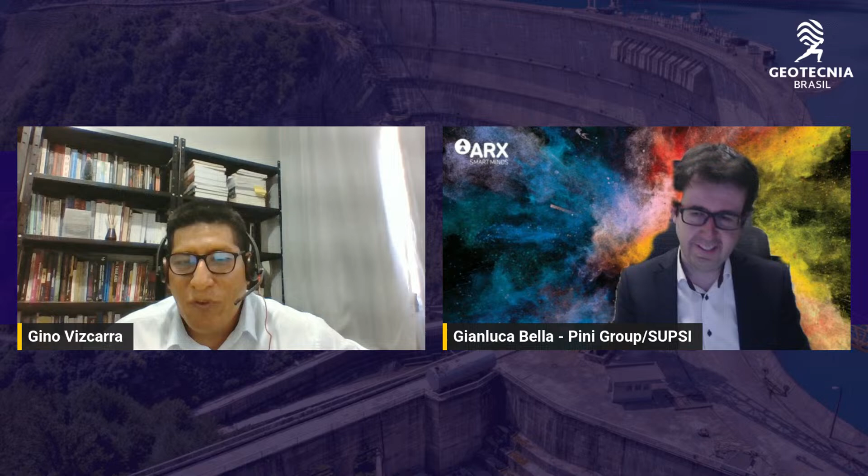Good afternoon, ladies and gentlemen. It's a pleasure for me to be here to hold this lecture titled An Insight into the Water Retention Capability of Unsaturated Fluorite Mining Tailings.

This lecture aims to provide an insight into the water retention capability of the Stava tailings collected from the Prestavel Fluorite mine that failed in 1985 in Italy. The focus, the objective of this presentation, will be the evaluation of the water retention curve as a key tool for tailings characterization and for interpreting some peculiarity of the unsaturated soil response.

Let's have a look at the index. First of all, an introduction. Then I will provide you with some basic concepts about unsaturated soil mechanics. The third chapter is devoted to describing the case of Stava tailings - the event, the geomechanical characterization of the tailings, the experimental apparatus I used and the testing techniques - and I will describe the experimental results with some comments. Then I would like to present some additional applications, in particular how the water retention curve has been used by me and my colleagues to interpret the volumetric soil response of tailings and the deformability behavior of the soil. Then some conclusions will follow.

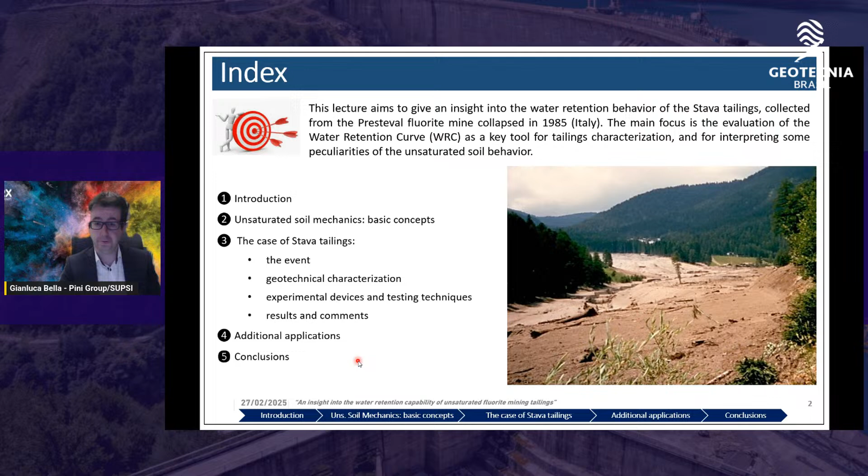So we can start with the introduction. What are tailings? Of course, tailings are the waste materials of a mining operation. They mainly consist of a mixture of silt, clay, sand, with usually a high content of metals, processed water coming from the mining operation, and chemical reagents. Depending on the solid-liquid ratio, they can show the consistency of a slurry, cake, or a paste. Tailing dams are complex geotechnical systems that contain the waste products of mining operations. They mainly consist of a decant pond, which we can see in the picture below, a raised embankment - the dam that we can see here - and a transitional intermediate zone, the so-called beach. There are many different rising techniques for tailing dams, such as upstream, downstream, centerline, and so on. This topic is quite large, and I will just show you in the introduction with some recall.

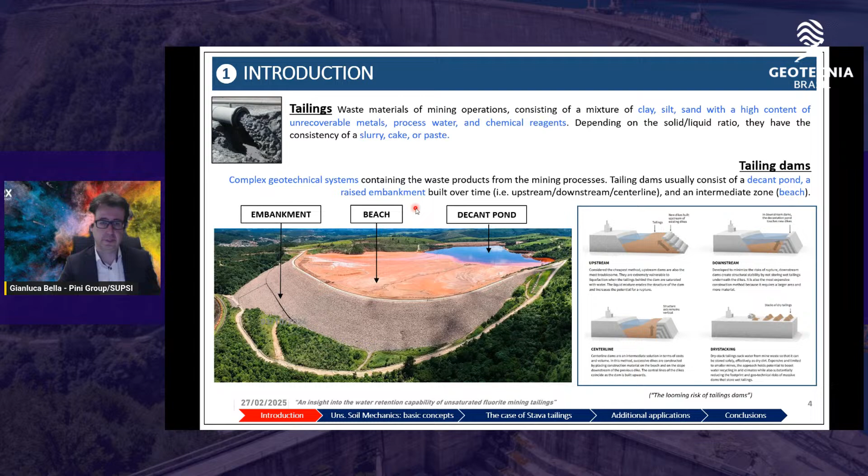Why is the stability of tailing dams relevant, especially nowadays? Well, it is relevant because tailing dams are complex structures that are particularly prone to failure for many reasons. For instance, they are made of heterogeneous filled material, they are raised over a large period of time, sometimes there is poor regulation governing the design criteria, and their large surface makes punctual criticality identification quite difficult. So they require extensive and continuous monitoring.

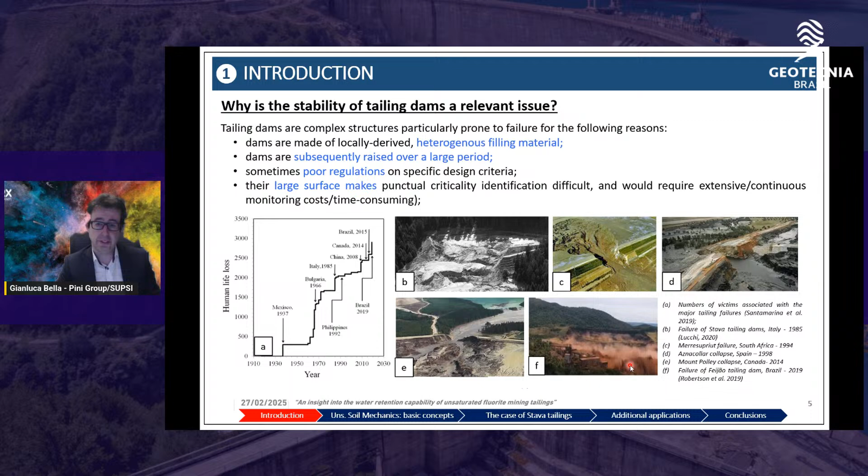Here we have an example on the right of some famous collapses. Here you can see the Stava collapse in 1985, the Merriespruit in South Africa in 1994, the Aznalcollar in Spain in 1998, and the more recent collapses, Mount Polley and the Feijão Dam some years ago.

The analysis carried out in the literature highlights that the historical trend regarding the number of failures is quite high. We can see from this graph that there is an average of 2.5 failures or collapses per year, which is quite a high number.

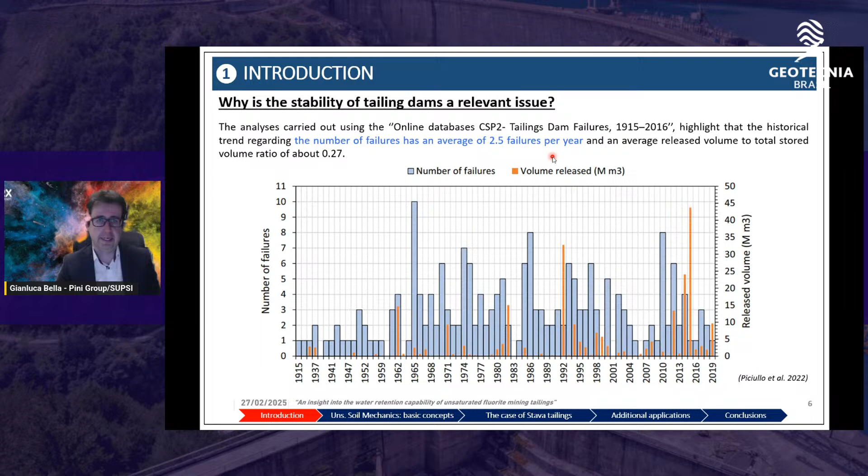The collapse of the structures results in casualties, environmental costs, and so on. As we can see in the picture below, the tailings growth is estimated at about 12 kilometer cube, so it is a very high quantity.

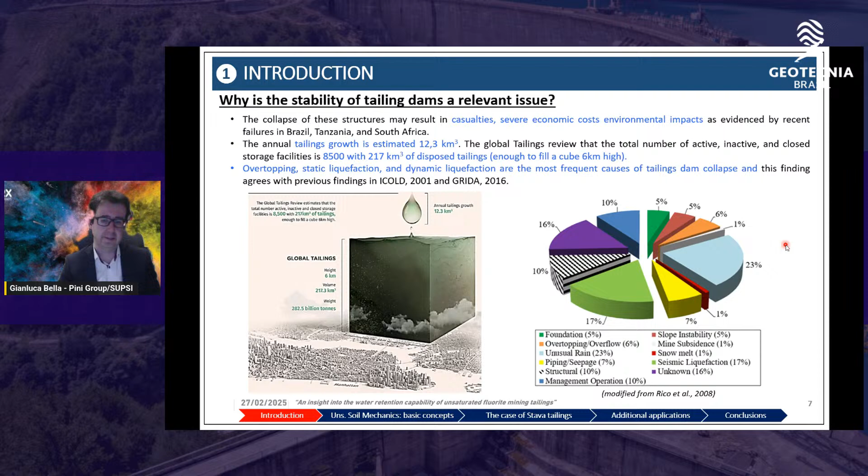As we can see in the picture on the right, the main causes of failure are overtopping, static liquefaction, cyclic or dynamic liquefaction, and so on. So these structures are quite problematic and need deep investigation.

Here I resume the main causes of tailing dams collapse. The collapse of tailing dams could be due to one or a combination of many factors. I listed the main ones: poor drainage, poor design, poor maintenance, seismic activity leading to dynamic liquefaction of the soil, foundation instability, erosion, slope instability, piping and seepage, structural failures, human error,

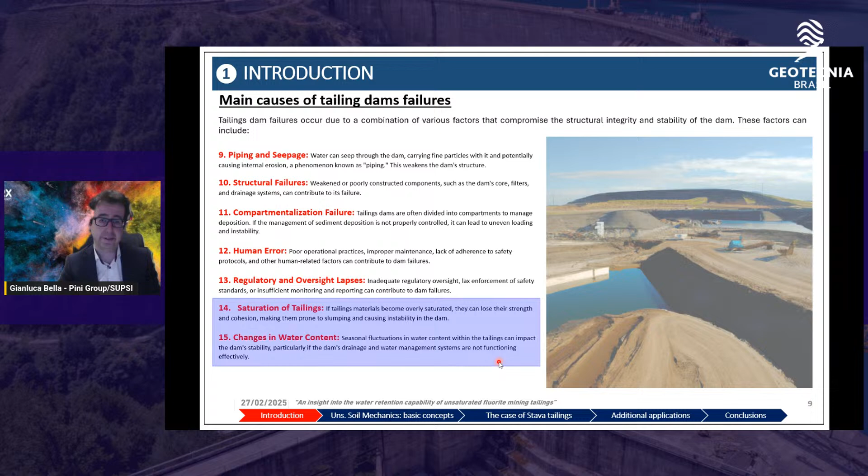or one of the most critical causes, the saturation of tailings and the change in water content. These causes are strictly related to the topic of this presentation.

As we can see in these pictures, a wide surface area of tailings is exposed to the atmosphere, which governs the position of the water table within the basin, as you can see here, leading to variation in the extension of the unsaturated zone above the

phreatic surface. So the unsaturated condition mainly involves a large portion of tailings, and this is why we are dealing with tailings in unsaturated condition in this lecture. In particular, the unsaturated condition involves a shallow layer, because they are involved in the water exchange with the atmosphere, for example infiltration, runoff, evaporation, and so on.

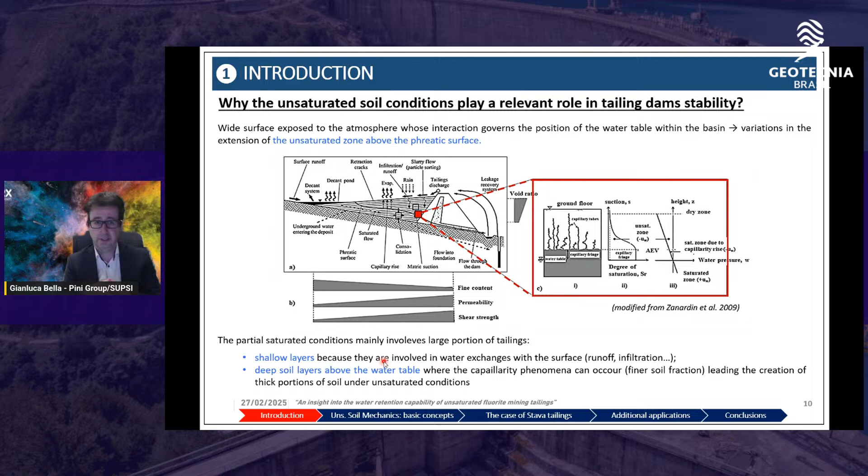But partial saturated condition also involves deep soil layers above the water table, where the capillarity phenomena that we will see in the next picture can occur.

In fact, as we have a small variation in degree of saturation, we have a big variation in the B Skempton parameter, and a big decrease in excess pore pressure. So this influences in a great manner the static liquefaction susceptibility.

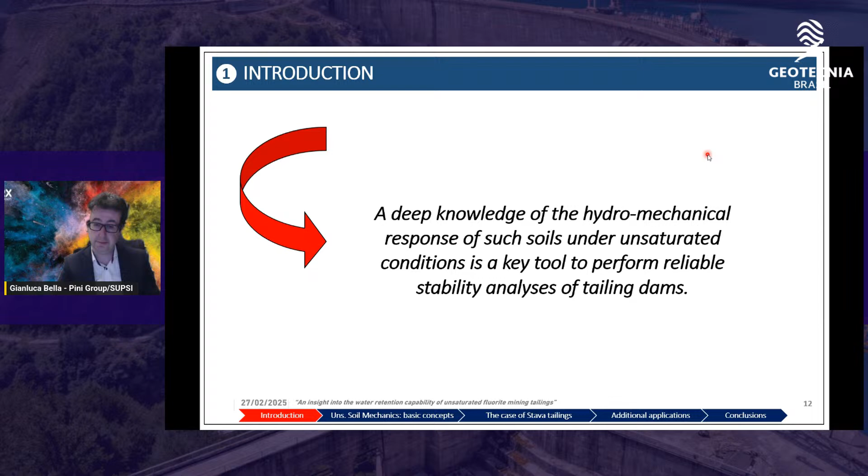Okay, now we can proceed with some basic concepts, with some recall about unsaturated soil mechanics, before showing my experimental investigation.

Below the water table, we are under saturated condition, so the pore pressure is positive and the degree of saturation is 100%.

Above the water table, what do we have? We have, first of all, a zone where we still have full saturation of the soil. This is the capillarity saturation zone.

And then after a certain height, we have a partially saturated zone. In the unsaturated zone, the degree of saturation ranges between 0 and unity. The pore pressure is negative and the suction is positive.

We can say it's worth noting that the capillarity height is related to the diameter of the tube: smaller the diameter, the radius of the tubes, higher will be the capillarity height, and after that it also depends on the material, for example.

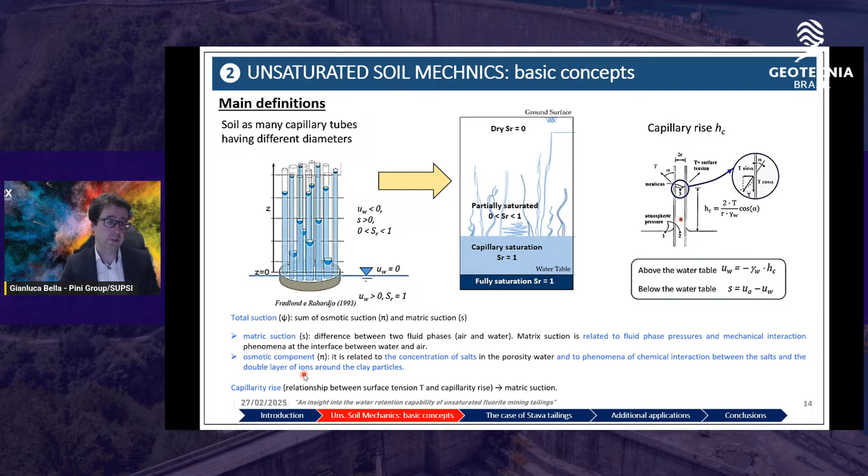The capillarity is governed by suction. The suction is the total suction, and can be divided as the sum of osmotic and matrix suction. The matrix suction is mainly related to the fluid phase pressure and the mechanical interaction phenomena at the interface between water and air, while the osmotic component is mainly linked to the concentration of salts and to phenomena of chemical interaction between the salts and the double layers of ions around the clay particles.

In unsaturated soil mechanics, we have three phases: the soil phase, and the void filled partially with water and partially with air. In unsaturated condition, the water in the contact zone between the grains gives menisci in a manner similar to what occurs in a capillary tube, producing a state of compression, the force P, between the grains. This is a great effect in unsaturated soil mechanics because it implies an increase of the normal stress between particles due to this force, so an increase of shear strength in unsaturated conditions, and a reduction of sliding occurrence.

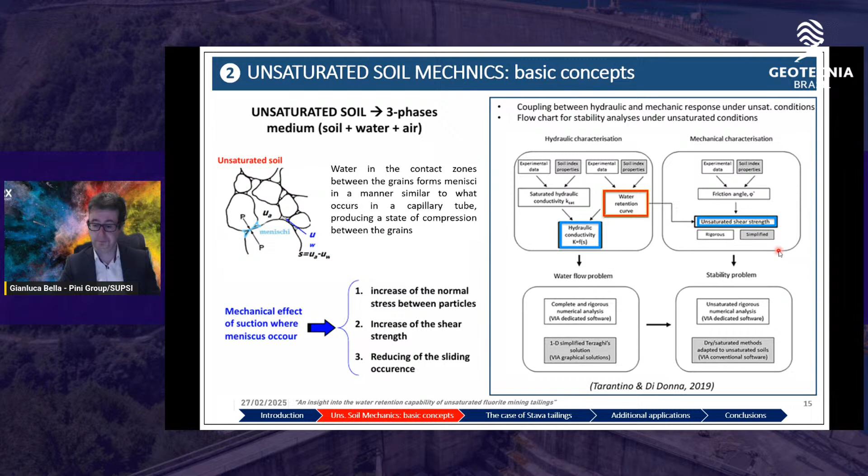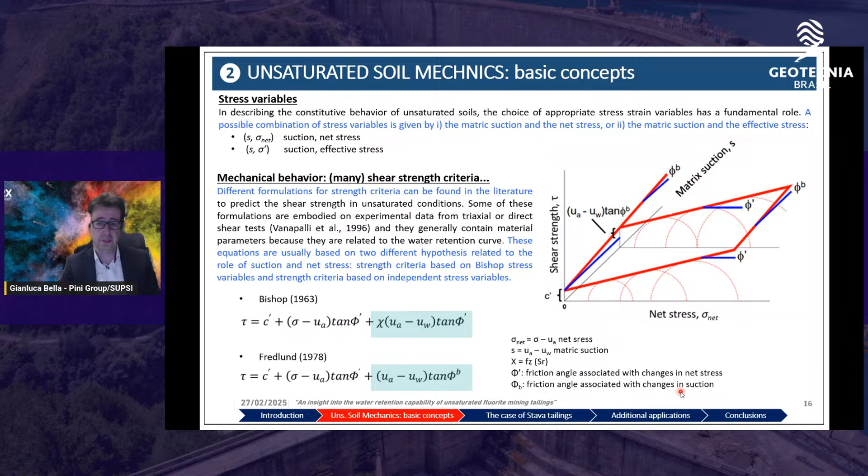Another formulation is the one proposed by Fredlund in 1978, which requires more parameters because, for instance, it depends on the friction angle associated with the change in suction.

So what is the water retention curve? That is the topic of this lecture. The water retention curve relates the water content, or the degree of saturation, or the water ratio of a soil with its suction.

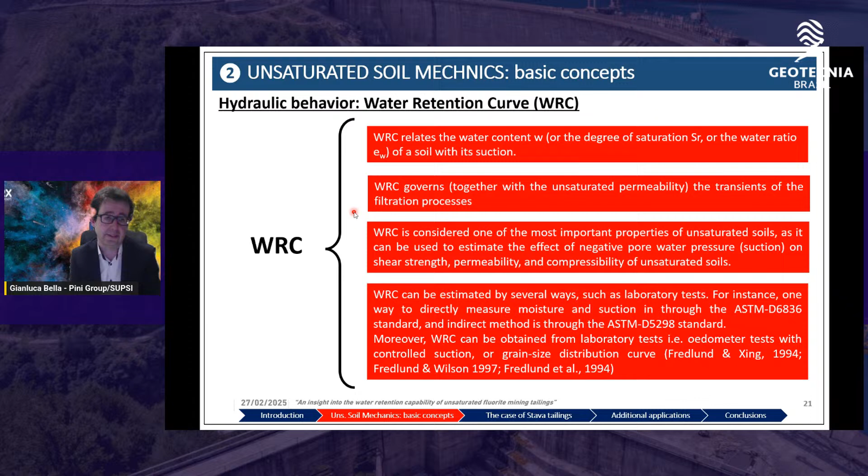So it can be estimated, as is the topic of these lectures, in several ways, such as laboratory tests, and can be obtained, for example, from oedometer tests, from suction-controlled oedometer tests, or from the grain size distribution curve.

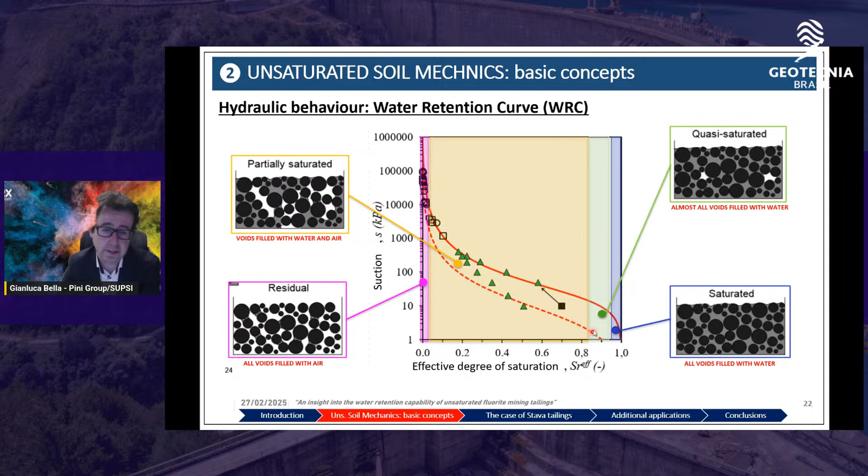This curve is able to describe the drying and wetting process of the soil, so the capability of the soil to retain water. It is strongly connected to capillarity, as I showed before, because above the water table we have a zone where capillary saturation is with a degree of saturation equal to 1, and if we represent this with the water retention curve...

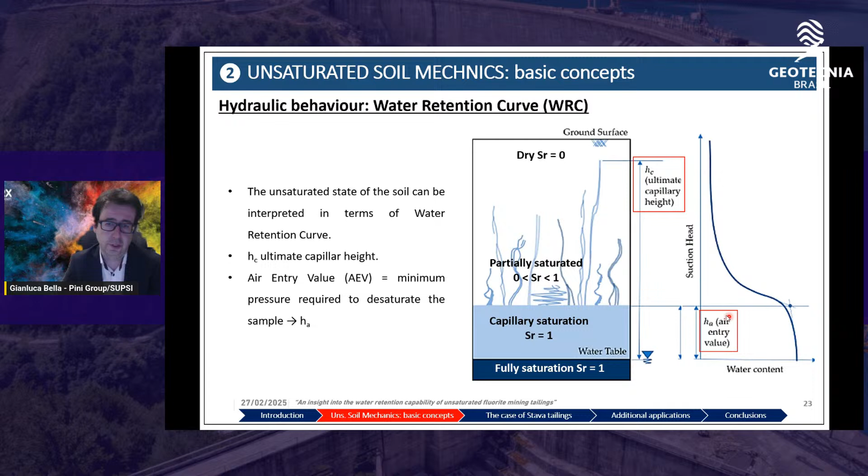This head corresponds to the air entry value of the curve, the point after which the saturation of the soil assumes very fast values less than 1. So we have the air entry value as the minimum required pressure to desaturate a sample.

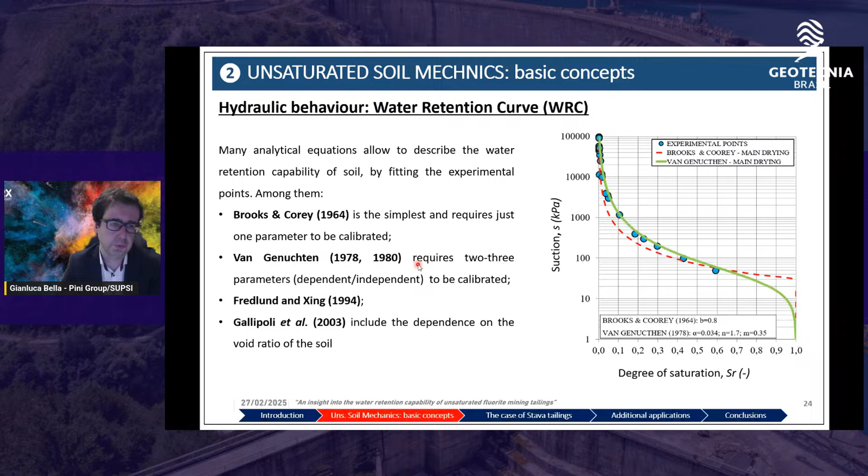There are many formulations to describe the water retention curves: the Brooks and Corey, the famous Van Genuchten model, and the Gallipoli model. So we have experimental points, and we can decide which formulation is the best. Of course, there are a number of parameters to be calibrated, different from one formulation to another.

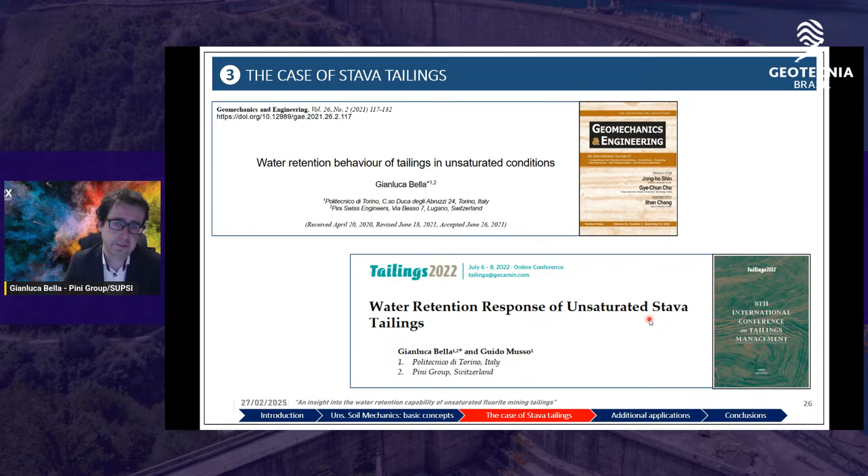After this short recall about unsaturated soil mechanics, we can start describing my research and experimental results. The results and interpretation I will provide are described in detail in some papers I published recently. For instance, this one, 'Water Retention Behavior of Tailings in Unsaturated Condition,' and more recently this other paper where you can find more detail.

The soil, the tailings I investigated, is the silty and sandy fraction of tailings taken from the lower portion of the Stava upper dam, built one above the other on a natural slope near the city of Stava, in Italy. The two tailings dams were gradually raised in an upstream way to store the waste products, the tailings, coming from the separation process of the Prestavel fluorite mine.

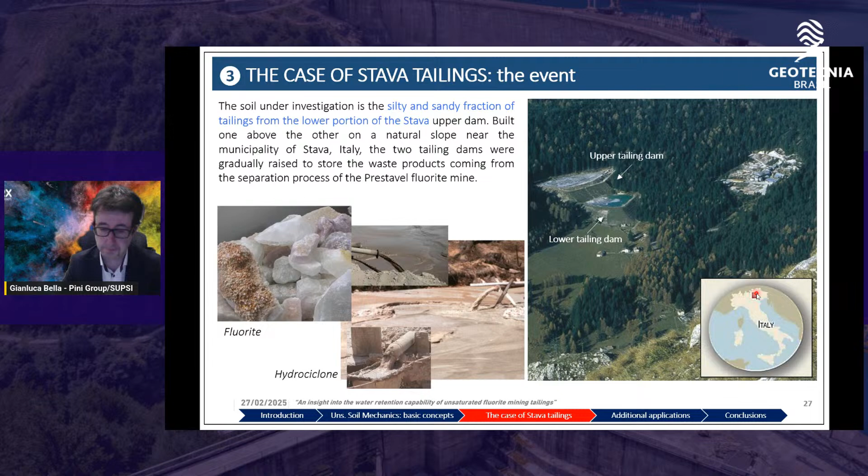What happened? On the 19th of July in 1985, the upper tailings dam collapsed onto the lower dam, which in turn collapsed, triggering the static liquefaction of the stored materials. A very big volume of tailings, a mud flow, spilled out into the Stava valley.

The mud flow traveled, reaching the Stava municipality, located south of the embankment. You can see here the embankment. It destroyed this municipality, continued its path, and reached the city of Tesero.

268 people died. There were a lot of environmental and economical damages. The poor drainage, high phreatic levels, and unconsolidated state of the stored tailings are supposed to be the main factors leading to the static liquefaction of these tailings. The tailings I tested were taken from the upper embankment, here more or less.

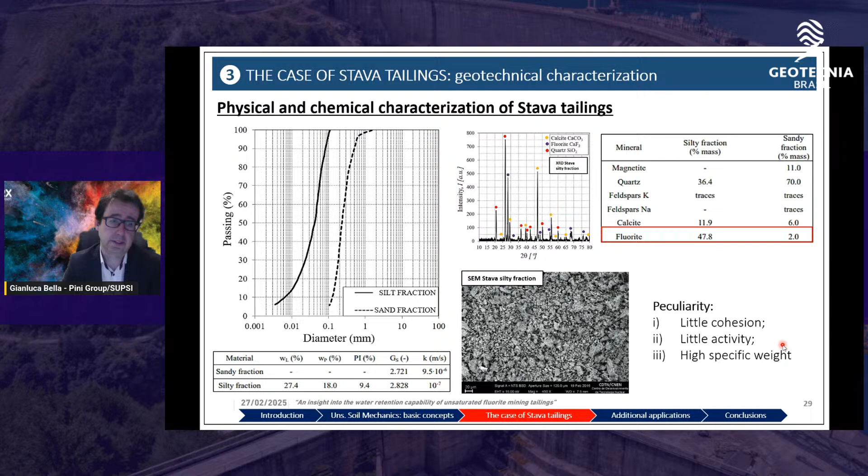Here you can see the plastic Atterberg limits, the hydraulic conductivity, and we performed some electron microscope analysis on these materials, so we saw that the silty fraction was made up mainly of fluorite and quartz. The peculiarity of these tailings is little cohesion, little activity, and high specific weight.

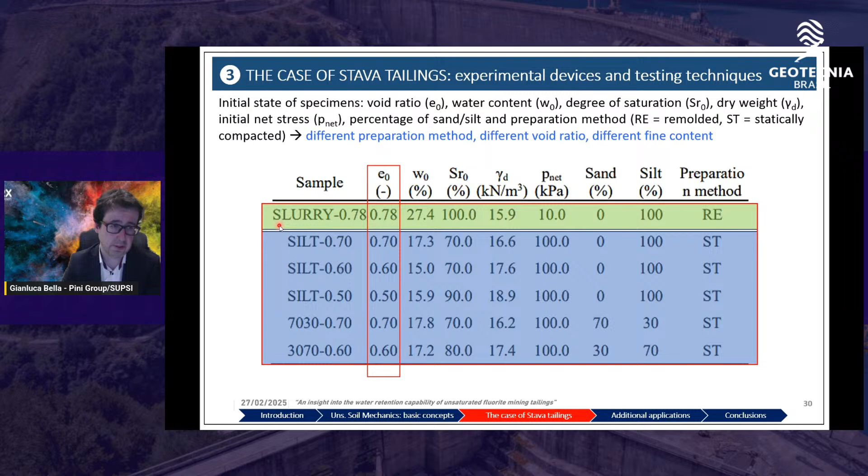Here you can see the slurry, and here the compacted specimen, together with different initial void ratios and different fine contents. This is pure silt, and these are mixtures made of sand and silt.

The water retention behavior was investigated by means of different techniques. First, the suction was imposed and the water content was monitored, using the axis translation technique and the vapor equilibrium technique. Or we adopted other tests where the water content was imposed and the suction was measured, using the dew point method.

This is an example of the water retention curve that we obtained, with the experimental points: the green points from the axis translation technique, the red points from the dew point technique, and the blue points obtained with the vapor equilibrium technique.

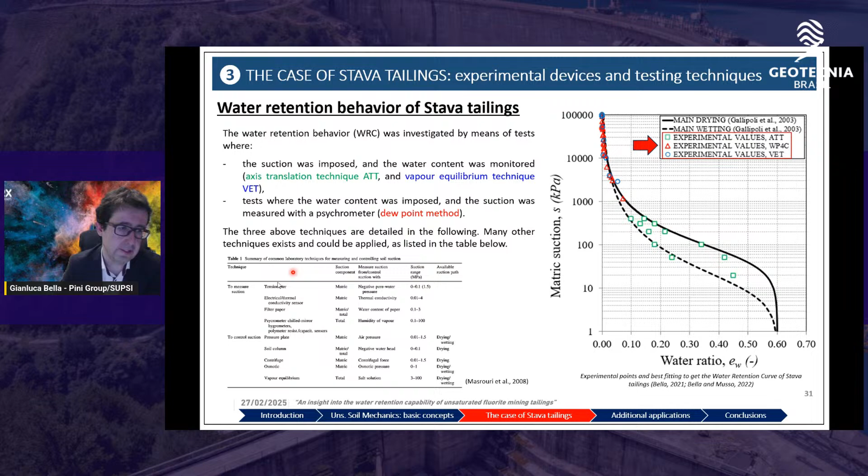It's worth noting that we adopted these three techniques, but in literature there are many other techniques that I listed in this table. The first technique we use is the axis translation technique.

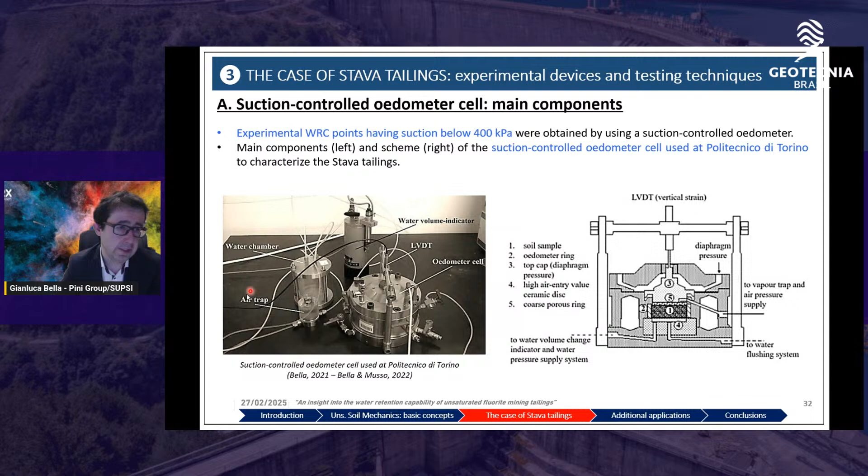As I told before, we adopted a suction-controlled oedometer cell, so the experimental points having a suction below 400 kPa were obtained with these suction-controlled oedometers. This is a picture of the oedometer I adopted at Politecnico di Torino to characterize the Stava tailings, and here we can see the main components: the cell, the LVDT apparatus, the water volume indicator, a water chamber, and the air trap. On the right, we can see a scheme of such apparatus. What is the working principle?

Different air pressure and water pressures are imposed to control the matric suction, that is the difference between air pressure and water pressure. Then exchange of water inside and outside of the sample is measured, providing the degree of saturation of the sample. This procedure is repeated by imposing different suction values, increasing or decreasing the suction, so imposing drying and wetting paths to obtain many experimental points to fit the water retention curve.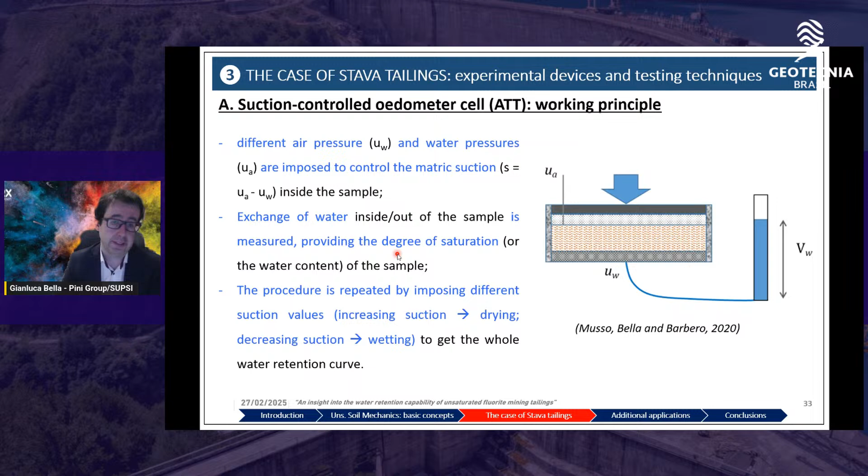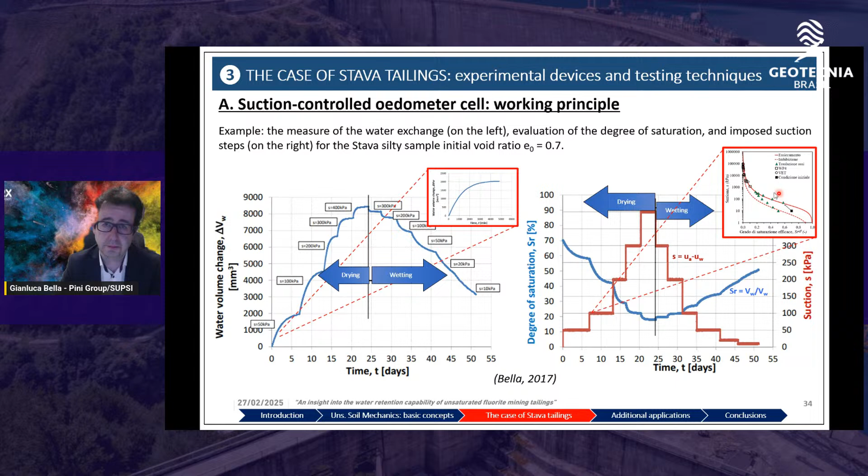The second technique we used for obtaining the water retention curve was the vapor equilibrium technique. The experimental points with suction up to 70 MPa were obtained with this technique.

The vapor equilibrium technique is a method allowing control of the relative humidity to impose a certain total suction. The total suction was imposed by creating a controlled humidity condition in a closed box using a chemical solution. This condition is obtained in a sealed glass container with a support in order to hold the sample. Inside the box, we have a chemical solution.

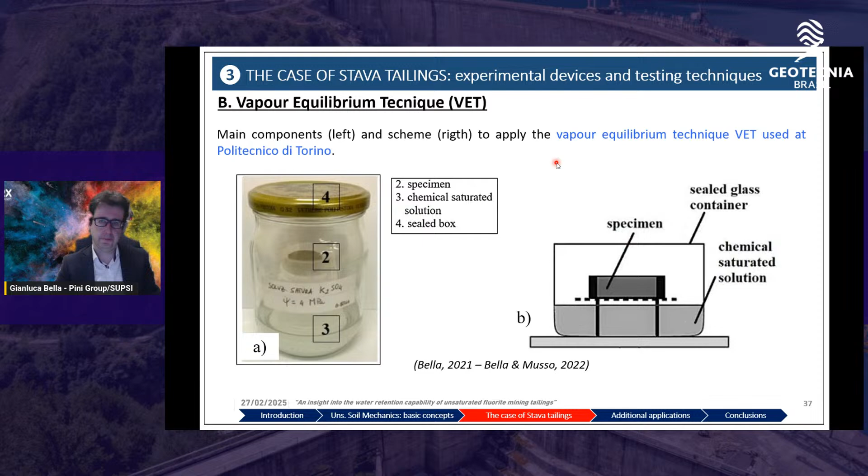Here are pictures of what I just explained. We can see the sample suspended, here the chemical solution, and this is the closed box. Again, this technique was used at Politecnico di Torino.

Finally, the dew point technique was applied together with the previous two techniques to obtain more data. Psychrometers were used to measure the total suction. The measuring of the total suction by using the dew point technique mainly consists in equilibrating the vapor phase of the water in the air space above a sample, again in a closed chamber, with the liquid phase of the water within the unsaturated specimen.

A cooling system, we will see the picture in the next slide, is used to cool a mirror until some dew forms. An optical sensor is adopted to detect the formation of this dew on the mirror, while a thermocouple attached to the mirror measures the dew point temperature. In the meantime, the temperature of the sample is obtained with a thermometer. A fan is also used to circulate some air and speed up the vapor equilibrium.

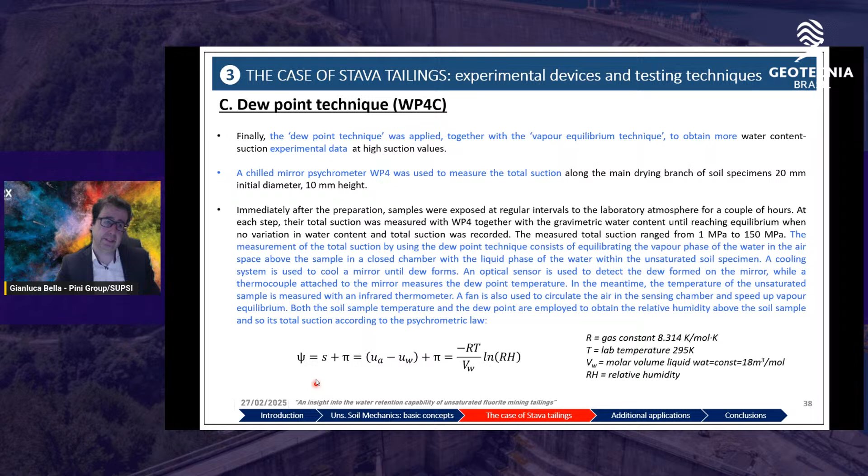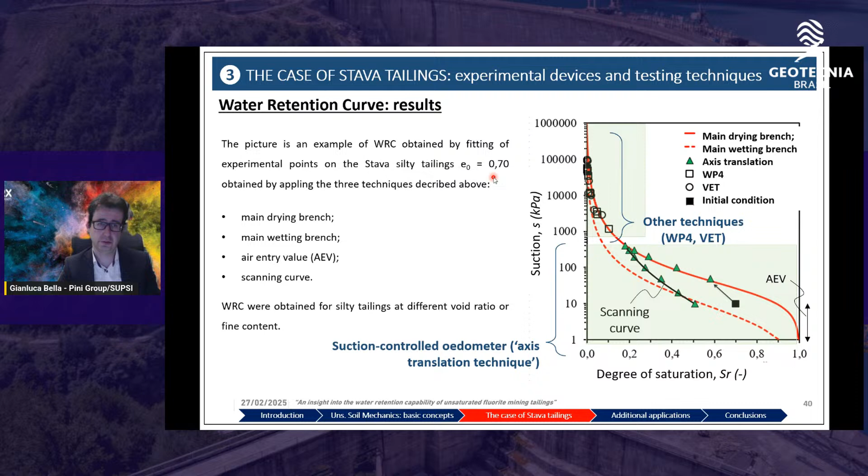This is the water retention curve, an example of what we obtained, for instance, for Stava silty tailings with initial void ratio 0.7.

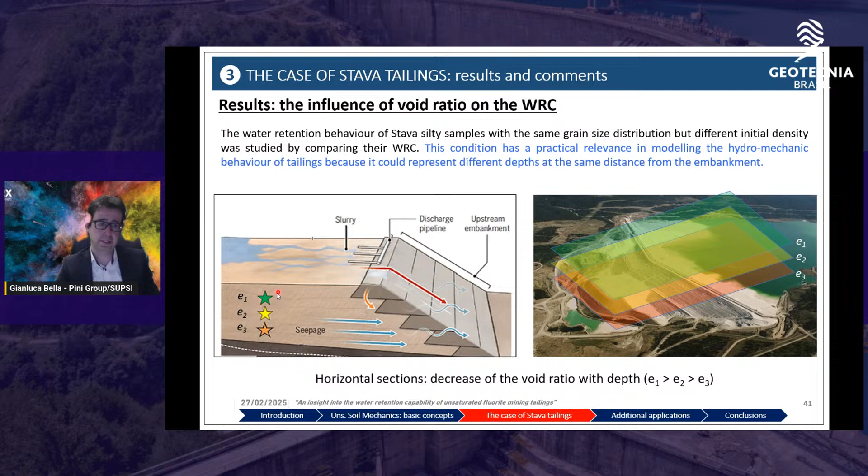Let's proceed with the results. We studied the influence of the density on the water retention curve. This condition has practical relevance in modeling the hydromechanical response of tailings, because this could represent different depths that you can see here at the same distance from the embankment.

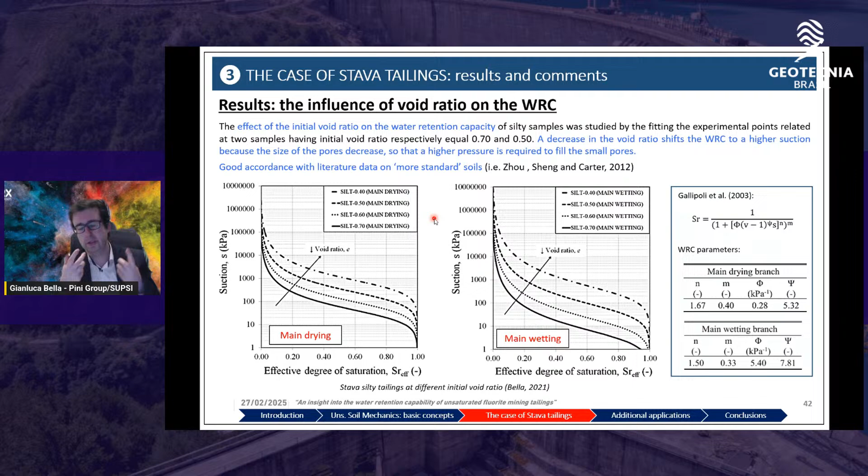Here we can see the main drying and the main wetting water retention curve of the Stava sample. We can see that a decrease in the void ratio shifts the water retention curve to higher suction values, because the size of the pores decreases, so higher pressures are needed to fill the small pores. This can be appreciated both for main drying and main wetting, and we have good accordance of our results with literature data on, let's say, more standard soils, not tailings.

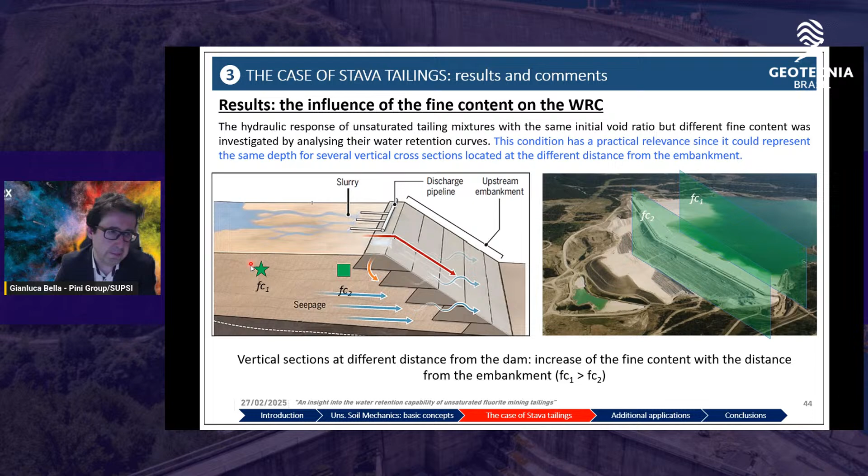We also studied the influence of fine content on the water retention curves. Again, this condition has great practical relevance since it can represent several vertical cross sections with different distances from the embankment. This is mainly due to the deposition technique: close to the embankment we have tailings with more sand, and far from the embankment, because of the deposition technique, tailings will be mixed with finer fractions such as silt.

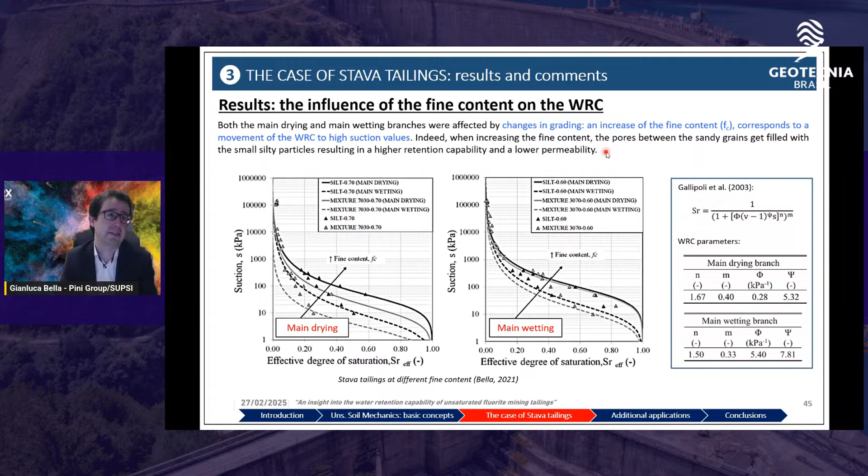So the influence of fine content on the water retention curve has been studied, as we can see in these two pictures, with main drying and main wetting curves. An increase in fine content corresponds to a movement of the water retention curve to higher suction values. In fact, when increasing the fine content, the pores between the sandy grains get filled with these small particles, resulting in higher retention capability and lower permeability.

For the Stava tailings, the water retention behavior is influenced by the soil structure, which in turn is influenced by the preparation technique. The slurry samples show greater water retention capability than the compacted samples, and this could depend on different pore size distributions obtained from the two different preparation techniques. So the preparation technique has a great impact on water retention capability of tailings, and this is observed also for other topics.

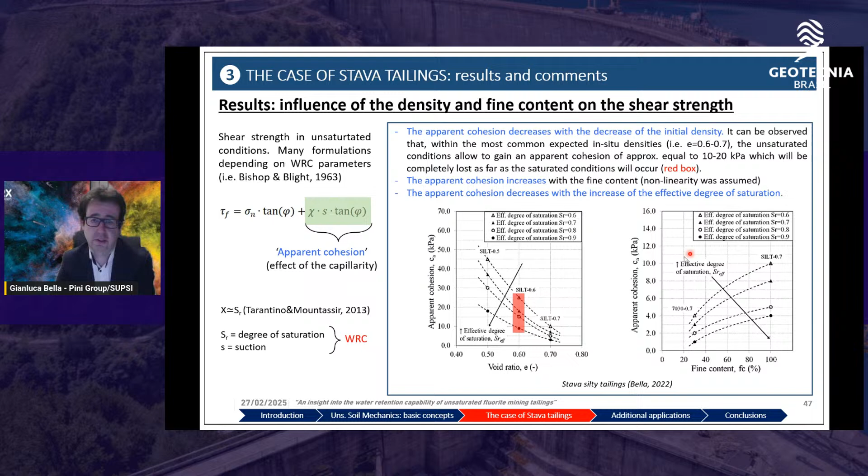The apparent cohesion increases with fine content, we assume due to non-linearity, and the apparent cohesion decreases with the increase of effective degree of saturation, as we can see in these pictures. This was published in this paper.

Finally, we investigated the influence of density and grain size distribution, so the fine content, on hydraulic conductivity. The hydraulic conductivity can be obtained by the product between saturated conductivity and relative hydraulic conductivity, obtained from the formulation proposed by Mualem, depending on degree of saturation and suction. An increase of void ratio, for example in loose samples, moves the relative hydraulic conductivity to a lower suction range.

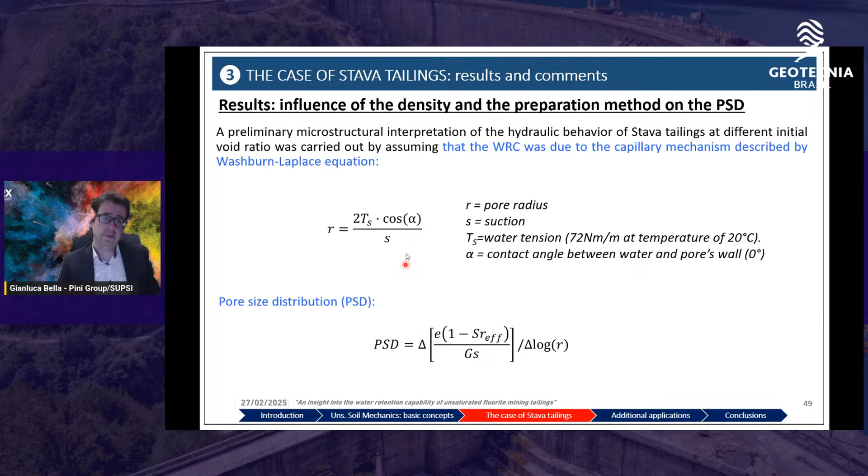Finally, we analyzed the influence of density and preparation method on pore size distribution. A microstructural interpretation of the hydraulic behavior of Stava tailings was carried out by assuming that the water retention behavior was due to the capillarity mechanism, described by the Washburn-Laplace equation shown here, from which we can obtain the pore size distribution.

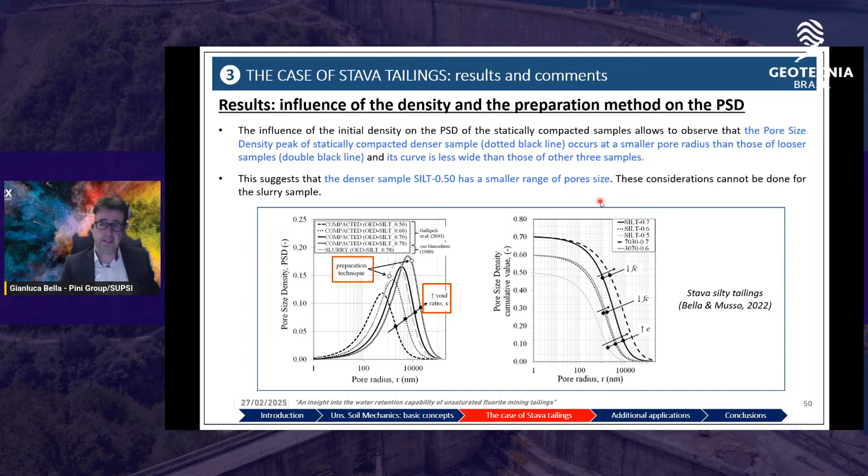The influence of initial void ratio on pore size distribution of the statically compacted specimens shows that the pore size density peak of the denser specimen, the dotted black line, occurs at smaller pore radius than the looser sample, and its PSD curve is less wide than the other three samples. This suggests that the denser sample, with a void ratio of 0.5, has a smaller range of pore sizes, and this consideration cannot be made for the slurry sample.

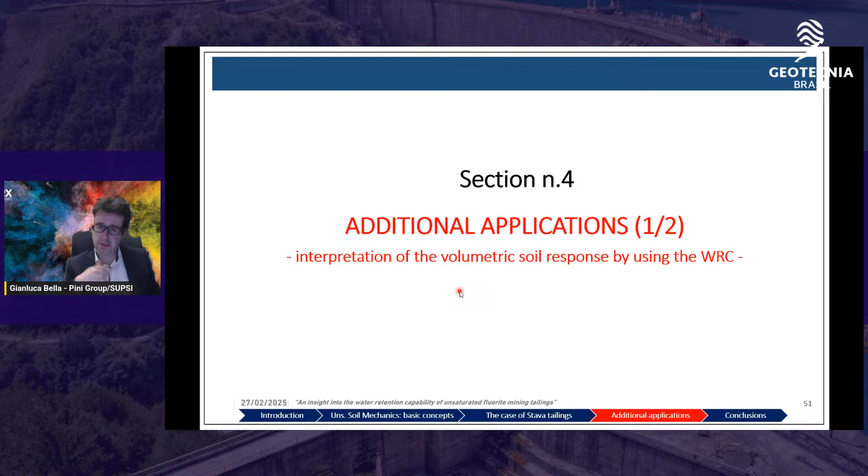I would like to spend the last part of these lectures showing some additional applications of the importance of the water retention curve in two cases. The first case is the interpretation of volumetric soil behavior using the water retention curve. You can see this topic in more detail than I'm describing now in these works: my PhD thesis, and in this published paper written together with Professor Guido Musso from Politecnico di Torino.

This application involves an experimental campaign of suction control triaxial tests to study the hydromechanical behavior of Stava tailings. The hydraulic paths and volumetric soil behavior were accounted for via the water retention curve, confirming the coupling between hydraulic and mechanical response in unsaturated conditions.

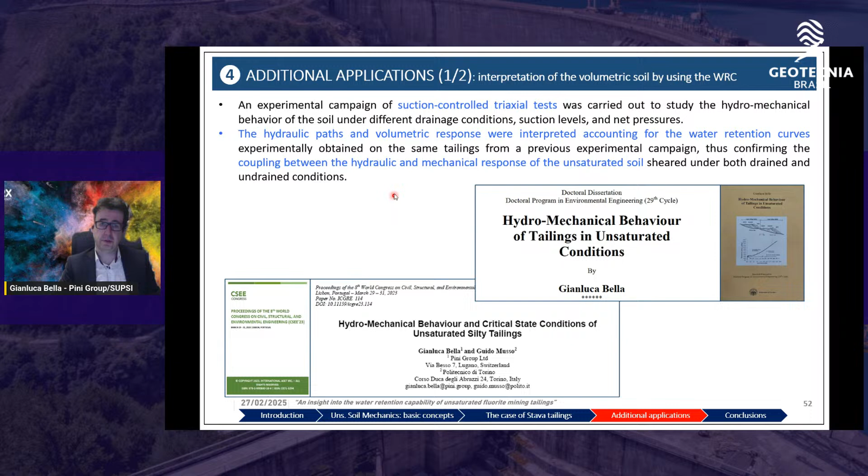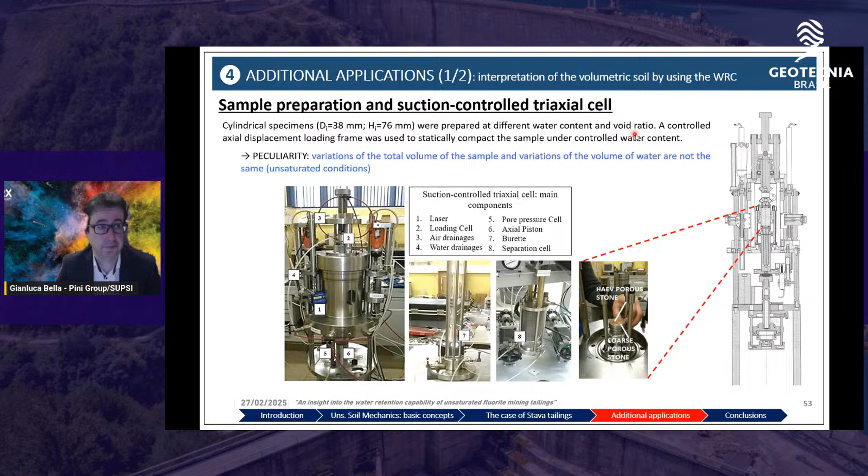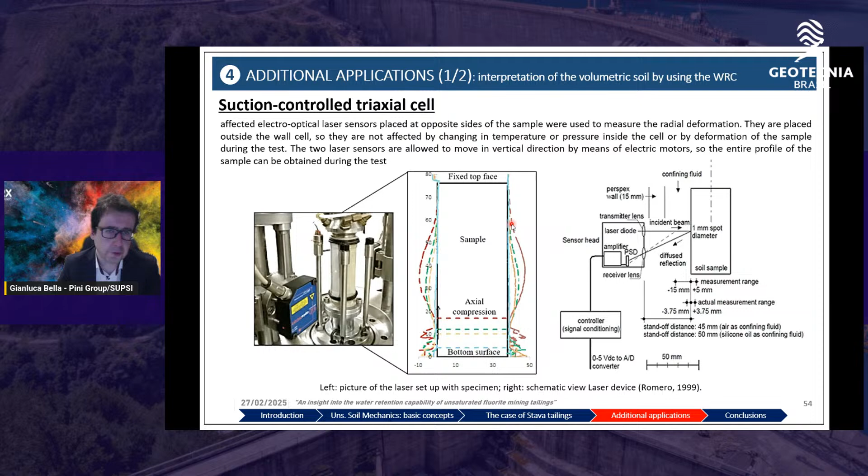Here you can see pictures of the apparatus we use within the suction control triaxial cell to monitor the shape of the sample during the test. These lasers are placed outside the cell, so they are not affected by changing temperature, pressure, and so on. They move up and down to obtain the scanning profile of the sample.

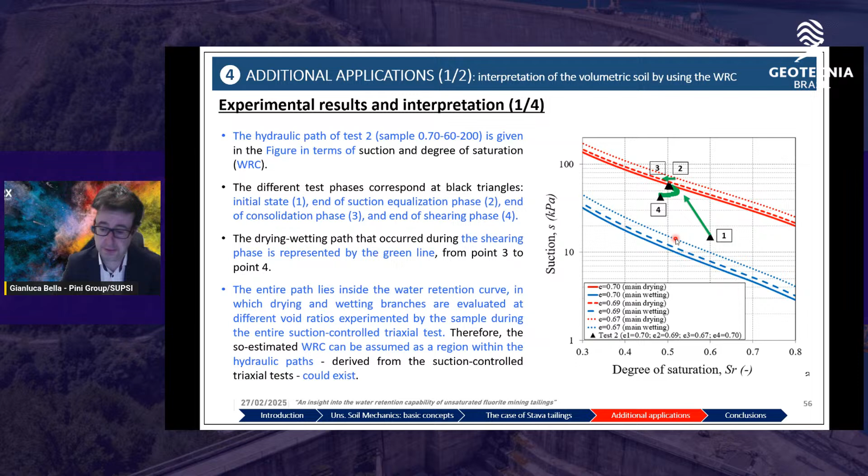We use the stress path and the water retention curve also to evaluate other peculiarities in terms of volumetric strain. Let's consider the sample with 0.7 initial void ratio, 60 kilopascal suction, consolidated at 200 kPa net stress in undrained condition. The hydraulic path of this sample is given in these pictures.

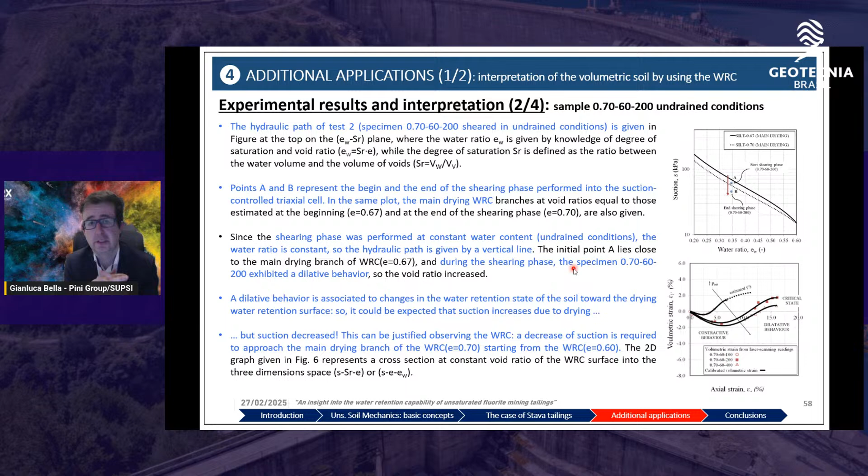The dilatative behavior is usually associated with a change in water retention state toward the drying water retention surface. So it could be expected that suction increases due to drying, but this did not happen during our experimentation. We observed that the suction decreases. So how to explain this unexpected behavior?

This could be justified by observing the water retention curve, showing the importance of this concept in explaining the volumetric soil response. How is this justified? A decrease of suction is required to approach the main drying branch of the water retention curve, starting from a void ratio of 0.6.

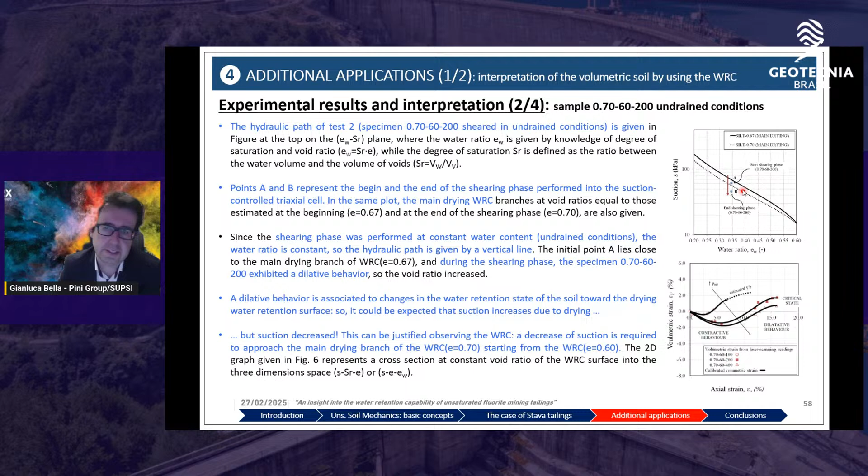The bidimensional graph given represents a cross section at constant void ratio of the water retention curve in the three-dimensional space. By considering this, we can justify that the suction decreases because we had to reach a point, point B, with a higher void ratio. So of course the hydraulic state of the sample is forced to move down.

If we consider another sample with a similar initial void ratio and initial suction, but consolidated at 800 kPa, also in undrained condition, what can we say? We can say similar considerations. The hydraulic path is given in these pictures.

We are again in undrained condition. The points A and B represent the beginning and final points of the shearing phase performed in the suction control triaxial test, and again we have both the main drying and main wetting branch of the water retention curve at the void ratio close to that estimated at the beginning of the shearing phase.

During the undrained shearing, the sample shows a volume reduction followed by a dilatative response. Since the shearing was performed again in undrained condition, the stress path is again vertical.

The initial state of the sample is point A, and lies close to the wetting branch, this line, because of the imbibition imposed after the consolidation during the test. So, based on saturated soil mechanics under constant water content condition and dilatative behavior, the pressure is expected to decrease, and this happens even under unsaturated condition, starting from the wetting branch.

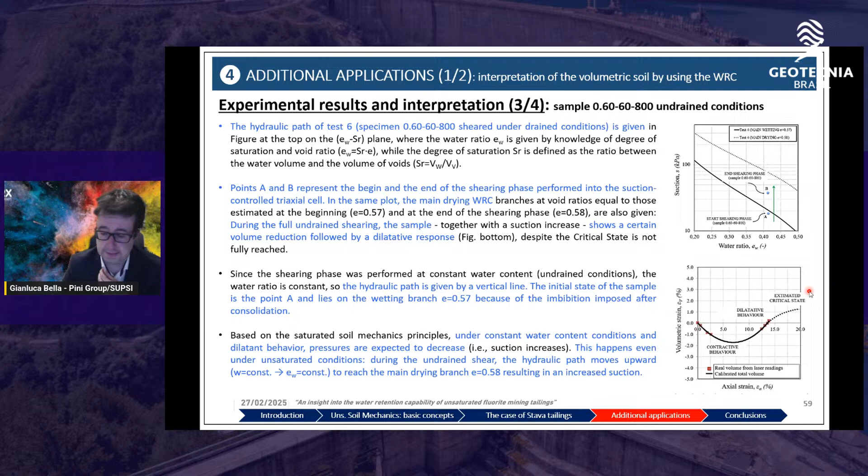Finally, it's possible to see another sample with another initial void ratio, 0.8. Another suction, a higher suction, was imposed on this sample, but what is important is that this sample was sheared under drained condition. The hydraulic path of this sample is given in these pictures at the top.

Points A and B represent again the start and final points of the shearing phase performed in the suction control triaxial test. And again, we have the main drying and main wetting branches of the water retention curve. Because of the drained condition imposed during the shearing, we have a horizontal stress path, so we have a horizontal line.

The initial point A is quite close to the main drying branch, but during the shearing phase this sample shows a pure contractive behavior, as we can see here. So the void ratio decreases.

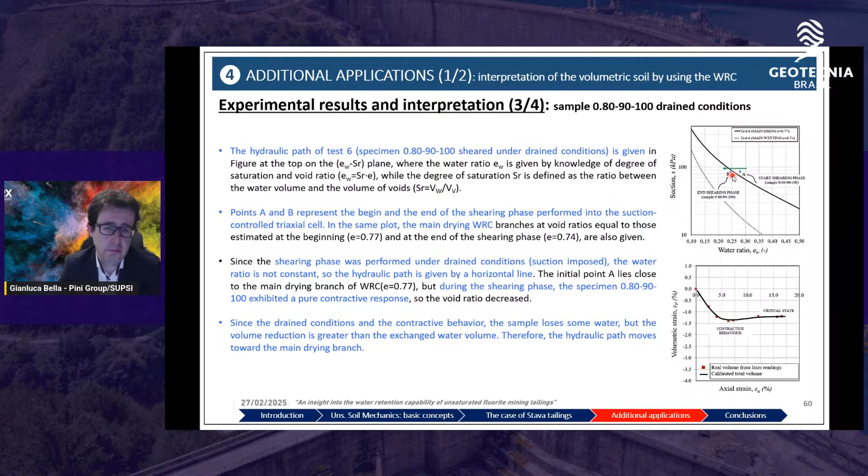So because of the drained condition and the contractive behavior, this sample lost some water, but the volume reduction is greater than the exchanged water volume. Therefore, the hydraulic stress path moves accordingly toward the main drying branch.

Finally, I would like to conclude with another application where we evaluated the soil compressibility, again of Stava tailings, and where the water retention curves give us some important information to interpret this.

As for the other parts of the lectures, you can see the results I will show you in these two papers, published with some of my colleagues at the University of Applied Science and Arts of Southern Switzerland. In particular, this final application involves an experimental campaign of conventional oedometer tests carried out on the same Stava tailings.

The dependence of the one-dimensional normal compression line and compressibility on the saturation state and preparation method is evaluated and interpreted, accounting again for the water retention curve.

This is the apparatus we used. As I said before, we performed an experimental campaign at the University of Applied Science and Arts of Southern Switzerland on statically compacted specimens, 50 millimeters in diameter and 20 in height. We tested the Stava samples with different void ratios and different initial degrees of saturation.

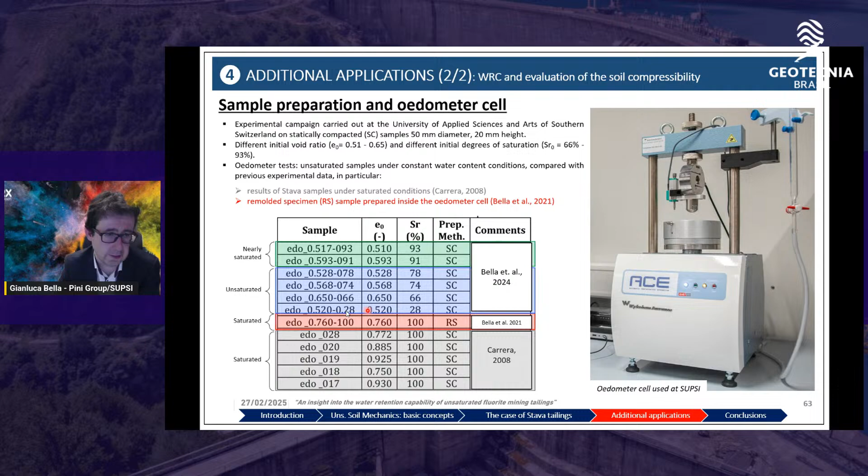Here is the list of the samples. The sample in nearly saturated condition we tested at SUPSI, and in unsaturated condition, with details in terms of initial void ratio and degree of saturation, together with the preparation technique of the saturated specimen from the previous experimental campaign.

As preliminary efforts, we can say that the suction level reached by the unsaturated sample during the conventional oedometer test was evaluated from the water retention curve, as we can see in these pictures.

The knowledge of water ratio allowed us to define a vertical hydraulic stress path, because, as I told before, we are in unsaturated, constant water content condition. The hydraulic paths cross the water retention curve main wetting branch, evaluated at the void ratio reached during the compression test,

when the 1D normal compression line could be identified. So the suction level can be obtained, practically, as an average value of two points. Here we can see the suction level reached by the nearly saturated sample and by the unsaturated sample during this experimentation.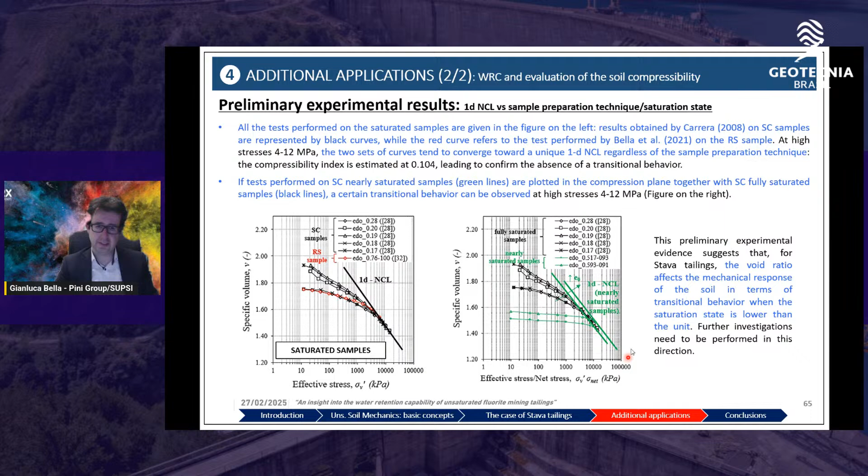If, on the other hand, test performed on statically compacted, nearly saturated sample, the green line, are plotted in the compression plane together with statically compacted, fully saturated samples, this one, we can see a certain transitional behavior, because we have 1D normal compression lines parallel, with the same slope, but parallel. So we can say that there is a certain transitional behavior, and the motivation, the justification of this, needs further investigation.

Finally, according to the Barcelona Basic Model, an increase of the compressibility index can be observed as the matric suction decreases, as shown in these pictures for the different samples, with suction evaluated again from the water retention curve.

Now, if just the effect of saturation on soil compressibility is analyzed, for instance the sample with initial void ratio 0.528, the red line, and the other sample given by the purple line can be considered. They have a similar initial void ratio, but differ in their initial water content. The compression index decreases from 0.059 to 0.049 when the water content increases. So the variation of the compression index is supposed to be due to the relevant change of soil stiffness with water content reduction.

On the other hand, if the effect of density on soil compressibility is studied, for instance by considering the sample given by the red line and the sample given by the blue line, we can see that they have quite similar initial water content but different void ratio. So the compression index increases when the initial void ratio increases. In this case, this could be mainly due to a decrease of soil stiffness with density reduction.

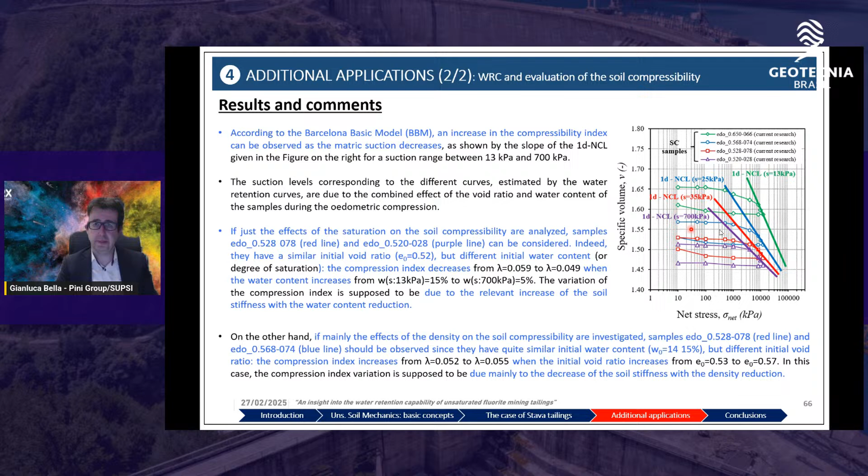I conclude my presentation with these final results. In particular, it was found from the experimental results that the compressibility index is a function of suction, as we said before, with the values of the compressibility lambda decreasing with increased suction. The Barcelona Basic Model was adopted to get the theoretical compression index based on the experimental data we obtained. A fast decrease of the compression index can be associated with suction increase, until reaching asymptotic values.

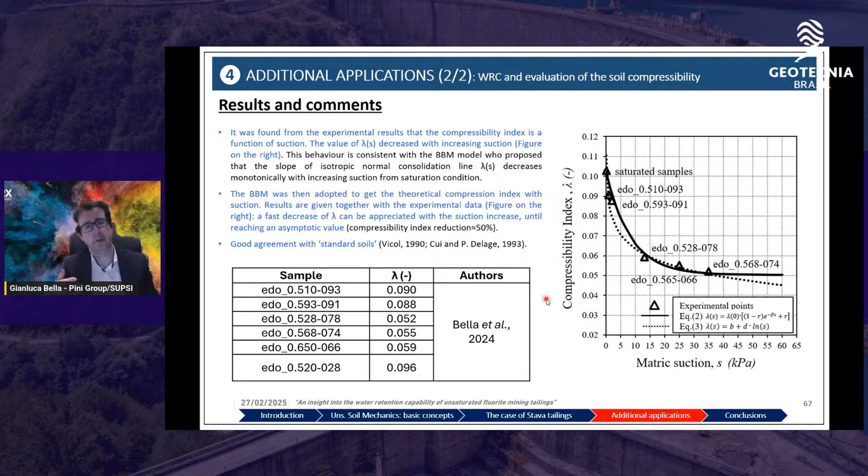And again, these data on tailings are in good agreement with data obtained on more standard soils, I mean soils not coming from mining operations.

So I can conclude my presentation with some considerations. First of all, tailing dams, because of their complexity, need very in-depth investigation during all phases, from design, to closure, to operational times, and so on. Due to the hydromechanical coupling in unsaturated condition, the hydraulic response of tailings affects the mechanical response of tailings, and so the stability of tailings dams in terms of shear strength properties, as we saw at the beginning of these lectures.

Unsaturated silty tailings were analyzed through water retention tests and suction-controlled triaxial tests. The effect of void ratio, fine content, and sample preparation method on the water retention capability of Stava tailings have been investigated, and the results are given.

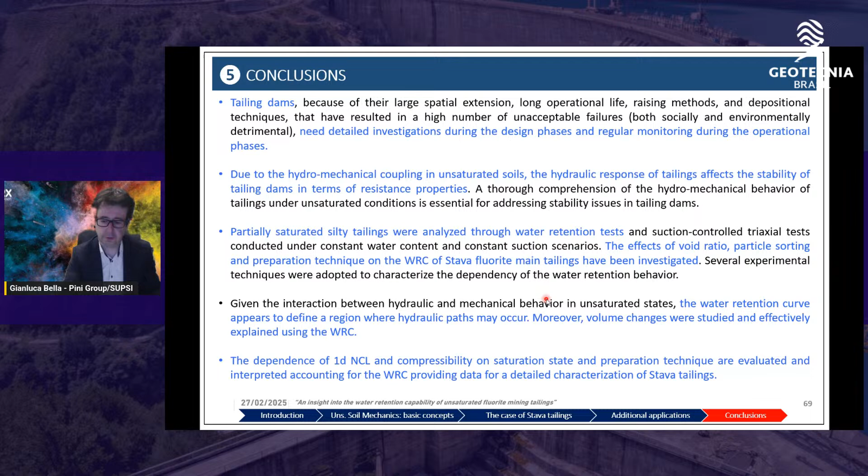Given the interaction between the hydraulic and mechanical response, the water retention curves seem to define a domain where hydraulic behavior could occur, and volume change was studied and explained using this concept. Finally, the dependence of the compressibility behavior on saturation state and preparation techniques is presented and interpreted, accounting for the water retention curves, providing a full set of data for a complete characterization of Stava tailings.

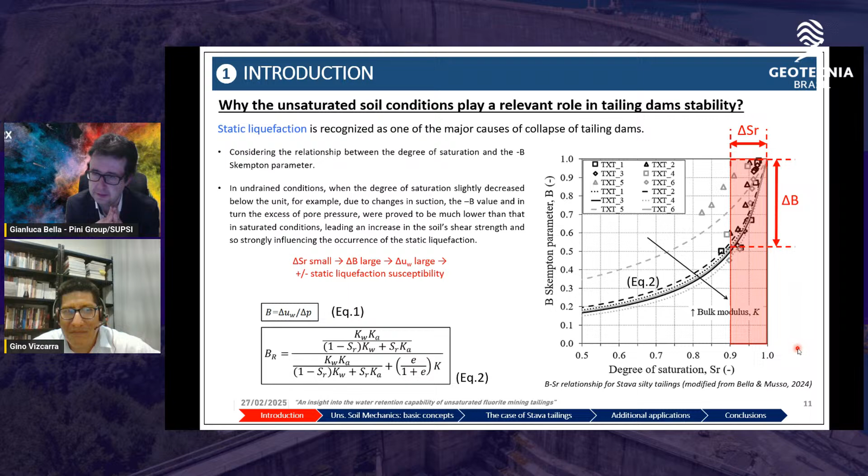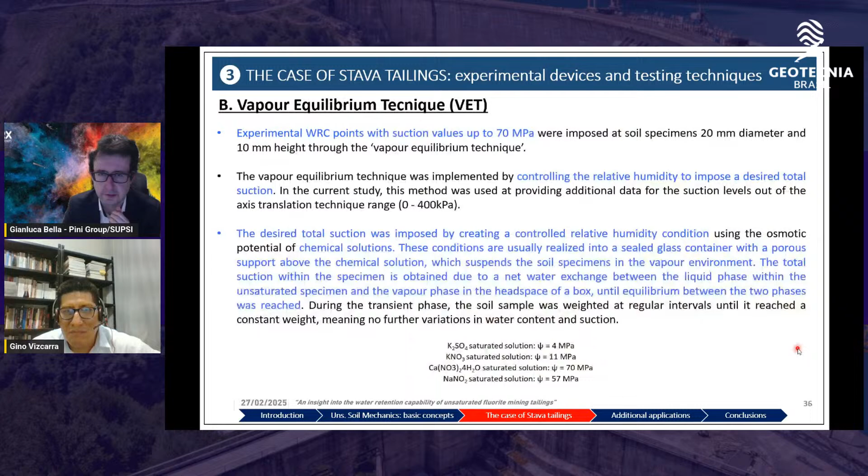Okay, thank you for your questions. It's an interesting question. At the moment I have not investigated this aspect. What I can see, let me go up with the presentation so we can be supported by a graph. Just a moment, I can try. This question would require some investigation, as far as I know.

What we can say about static liquefaction and initial void ratio is that, of course, static liquefaction is more prone for loose specimens, and loose specimens are the specimens with the lower air entry value. So just basing on this consideration, I would expect, but it needs more investigation, that the susceptibility of static liquefaction could be correlated with the inverse, so the decrease of the air entry value, I think. But this is a good suggestion for further consideration and investigation, of course.

Thank you. Yes, thank you. And the last one is: how difficult is it to calculate settlements in tailings storage facilities that experience unsaturated conditions? How about the volumetric deformation in unsaturated conditions?

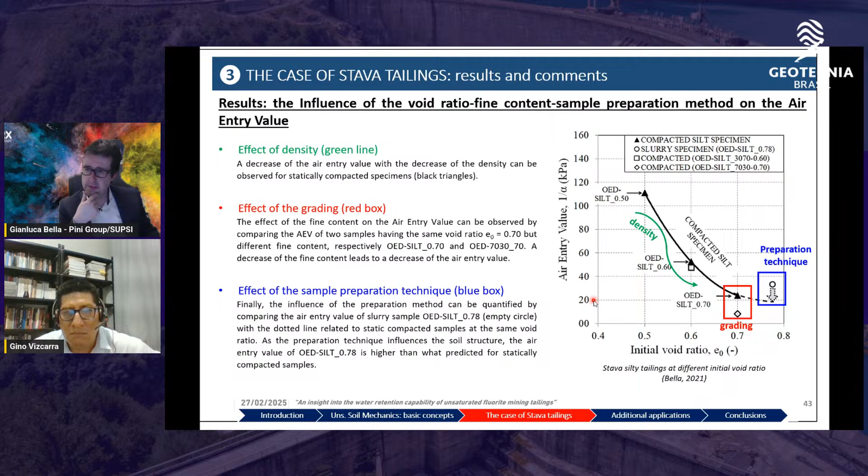The question is not easy, because of course, from the experimental point of view, the change of volume in saturated condition is related to the change of water. So when we measure some water coming out from a sample, we can say that this volume of water corresponds to the reduction of the total volume, because all voids are full with water. This is not easy in unsaturated states, and this is the reason I go up with my slide.

This is because we use this laboratory apparatus, the suction control triaxial test, where we can evaluate the water coming out or in from the sample during the test, and compare the water with the variation of volume. The variation of volume is taken from the laser scanner, performed by interrupting each phase of the test for one or two minutes to get the total volume. So by considering that the volume of solid is incompressible, the difference between the total volume read by laser scanning and the volume exchange measured by the volumeter is the volume of air in unsaturated condition.

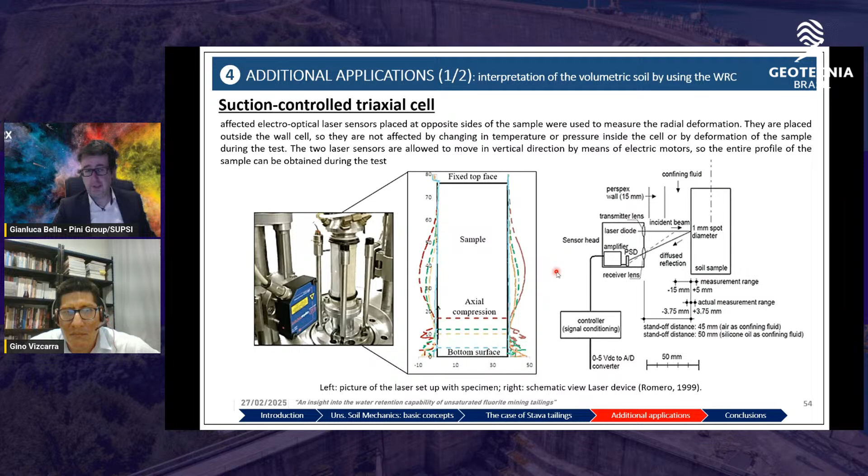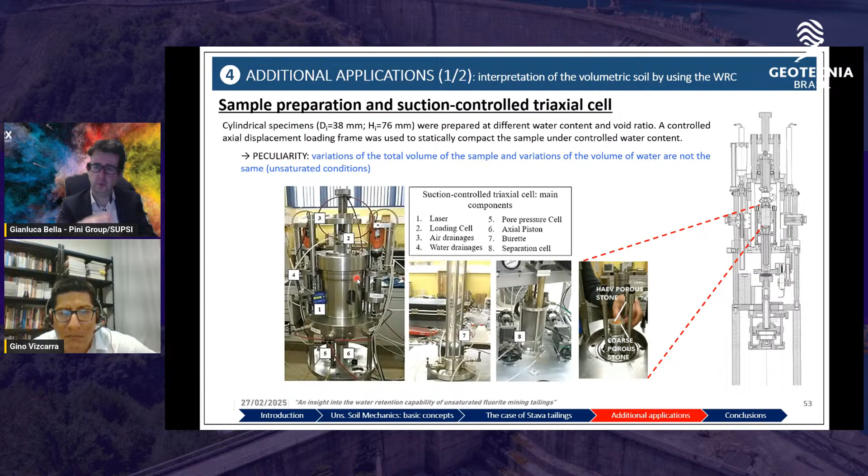This is in laboratory. Of course, these apparatus are quite complex and time-consuming, so the use of these tests is not so common because of many technical difficulties. For example, assembling the sample: the sample could be tested with a certain water content giving a certain apparent cohesion; if not, the sample could collapse and so on. So performing these tests for evaluating the volumetric soil response is not easy.

Totally different is the evaluation on site. The settlement of tailings on site is quite difficult, as far as I know. And I know that some causes of tailings dam collapse could be due to settlement experienced at constant load, meaning creep phenomena that are difficult to identify.